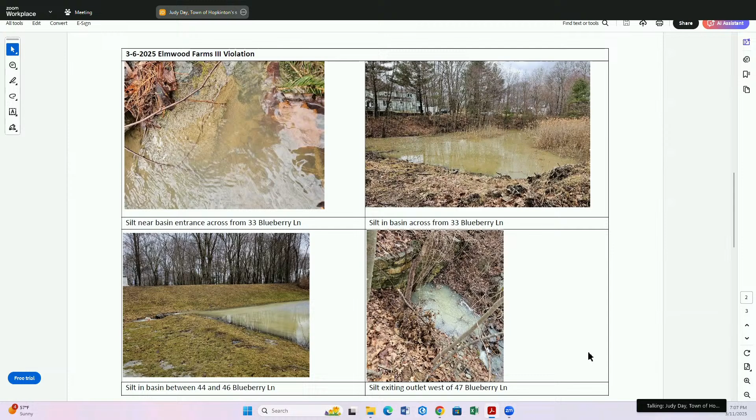The applicants, so Ted had said they weren't able to clean the silt out of the basins while they were frozen. So that's why we were trying to see if new silt was entering the first basin, which it did seem that it was.

Fitch was looking pretty dirty, with lots of loose silt on the roadway, and a lot of the wattles lining the roadway were in disrepair, ripped up, not continuous along the full extent of the disturbance.

Happy to answer other questions, or if Anna has anything to add.

Thanks, Jade. Thanks, Anna, for going out and checking that out. I walked around there also on Sunday and it was disappointing.

I believe we have Rich and Ted on the line here, and I'll give them an opportunity to speak before the commission weighs in.

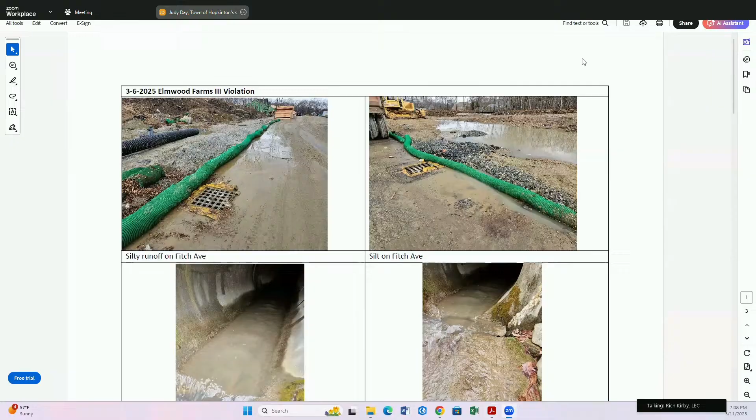Thanks, Anna. If I could share my screen, that would be great. Rich Kirby from LEC Environmental on the line tonight, and Ted Merchant from Toll Brothers.

Obviously, we're very disappointed to see the turbidity coming off the site after the overnight rain last week, Wednesday into Thursday. I was out there first thing Thursday morning to take a look at things, as was the commission's consultant. I talked with the contractor, and it seems there were a number of items that led to the offsite discharge of turbid water, but the primary one was the outlet control structure at the offsite basin, which was intended to retain all of the runoff coming from this site.

If the commission recalls, after the release at the end of December and early January, we met with you and implemented a number of measures to try and prevent this from happening again.

They included blocking up the outlet control structure, spreading seed, straw, and tackifier over large sections of the site that had been opened up, installing floc logs in some of the catch basins' downstream pipes, and installing silt fence and compost sock along portions of Fitch Avenue.

Since then, we implemented additional items, including installing temporary basins and temporary diversion swales along the pavement intended to collect and capture any runoff that was coming off the site.

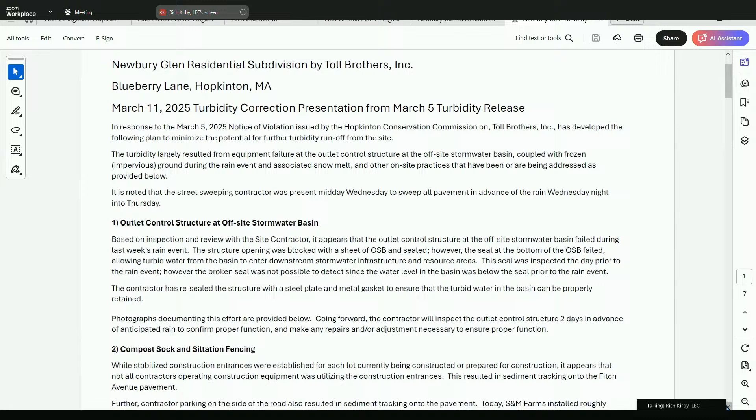We also had S&M Farms come out and install additional compost sock and siltation fencing along the length of Fitch Avenue, which is basically going to force the contractor and equipment operators to utilize those stabilized construction entrances.

It really wasn't possible to do that earlier because of the frozen ground conditions, and we needed to toe in the silt fence, which can't be done when the ground is frozen. We had a very short window between frozen ground conditions and the rain event, and weren't able to do it in advance, but it is done now.

We installed roughly 2,400 linear feet along both sides of the pavement. There is one 200-foot section that will be done on Friday after the contractor installs a utility duct, which parallels one side of the pavement along Fitch Avenue.

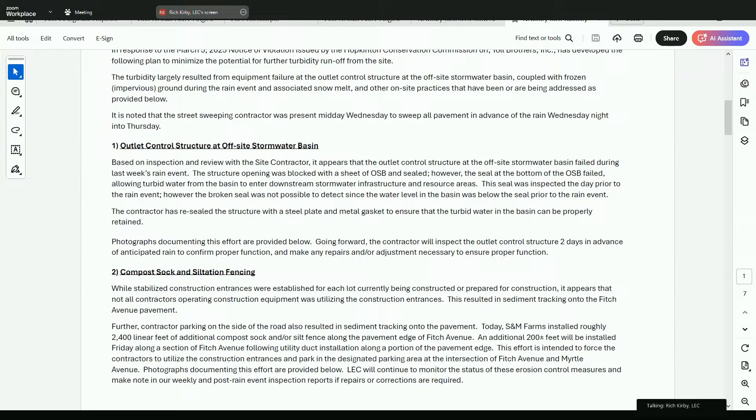On Friday, Hydrograss Technologies will be visiting the site to apply additional seed, straw, tackifier, and earth stop to exposed areas on the property. Most of the seed, straw, and tackifier applied in early January held, but some sections along the roadway shoulders didn't take as well because the ground was frozen at the time.

The ground is thawed at this point, so we're confident this will adhere much better. We'll be tackifying all along the perimeter drains, exposed areas on lots 8 and 9, the loam pile that's out there, and other exposed areas on the site.

We also installed additional floc logs within the drain manholes and catch basins within Fitch Avenue to further allow for sediment dropout before water enters that offsite basin. Lastly, prior to the turbidity release on March 5th, street sweeping occurred once per week. Going forward, it will occur three times per week to remove as much sediment as possible from the pavement.

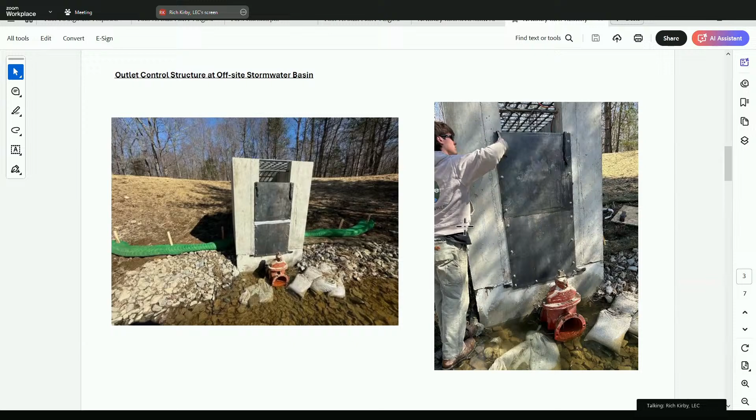Below are some photographs. This is the outlet control structure of the stormwater basin across the street, and this is the steel plate with the metal gasket that was bolted into the concrete. We're very confident in the integrity of this in terms of keeping the basin water out of downstream stormwater infrastructure and resource areas.

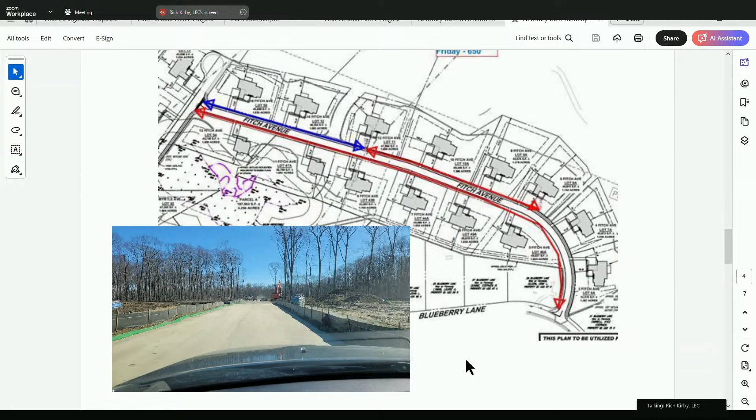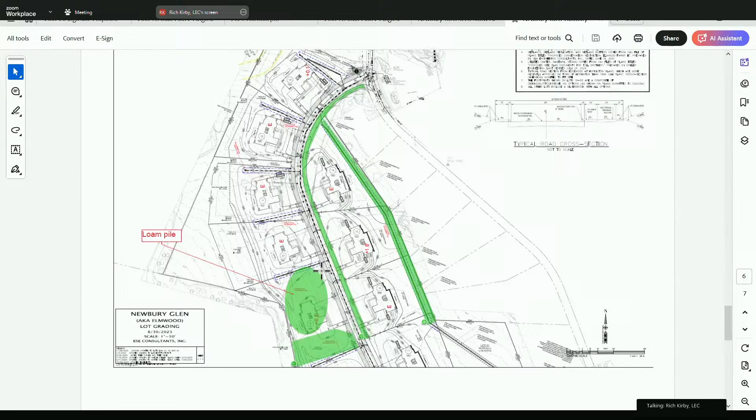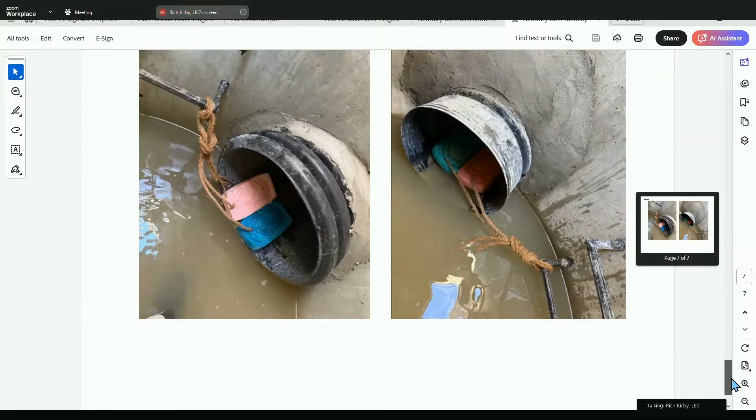So that provides an overview of our response to this. It's an unfortunate circumstance, but going forward with these measures—particularly the blocking of the outlet control structure on the offsite basin—I think we're going to be in pretty good shape. With that, I'm happy to turn it back over to the commission and happy to discuss further.

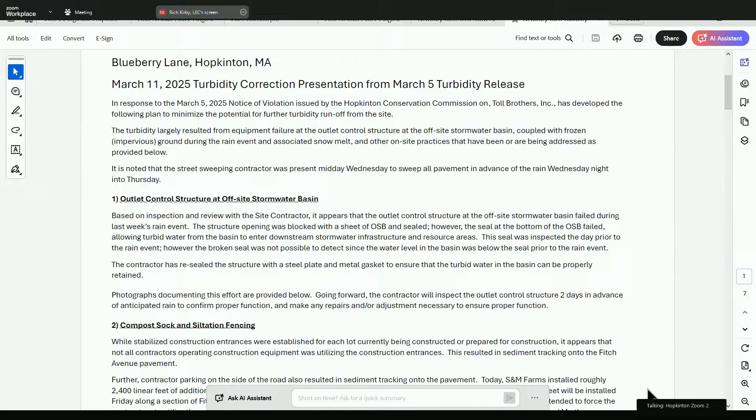All right. So I have to start by saying it's quite disappointing that we're here again—I think it's the third time in a row. We're kind of chasing our tails instead of being proactive once again. I think we're going into the worst season right now.

With the freeze and thaw and rain in the spring, we should be anticipating worst case scenarios, especially for this site, having already gone through this a couple times. So the commission is really not going to be very tolerant of what's going on here.

We really need proactive measures, not blaming the contractors for not using construction entrances. This is again a repetitive theme—blaming the contractors for not following the tree clearing line in the violation early on in the project. So the oversight on this project needs to be tighter.

It absolutely has to be. We really can't be coming in here after every single rain event fixing things—we need to be proactive. So that can't be a reason, blaming the contractors for not following the rules. It's the job of the developer and the people overseeing this plan to make sure the contractors are following and doing what they're supposed to be doing.

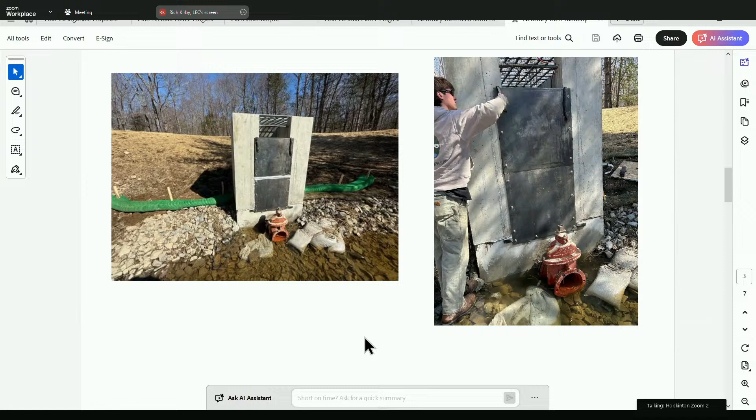Through the chair, I would appreciate another kind of level, because we're going into the spring and you can have back-to-back storms, and this thing fills up and it's not settled out yet to release through that valve. I think it would be prudent for there to be silt bags and pumps on site, in case this basin does fill up and you need a backup plan.

Through the chair, I haven't fully explored this yet, but I have a concept in mind at least of a recirculating pump and maybe some powdered floc in that scenario where we've got another storm coming and the basin remains turbid, to try to circulate. I can formulate a better plan probably in writing and submit it, but I think conceptually that might work.

Okay, yep, I'd appreciate that. Another question I had was at the intersection of Fitch and Myrtle, there was a big pile of dirt. What's going on with that?

There's a pile of sand that's being used as backfill for the utility duct being installed along Fitch Avenue and eventually Myrtle. I had instructed the contractor to install a compost sock around the base of that. Fortunately, that material is comparatively coarse compared to some of the really fine material we're seeing getting through the silt sacks and things, so it's less of a concern, although it is a concern. It is a pile of material, it's an active pile, but it does need to have erosion control measures around it.

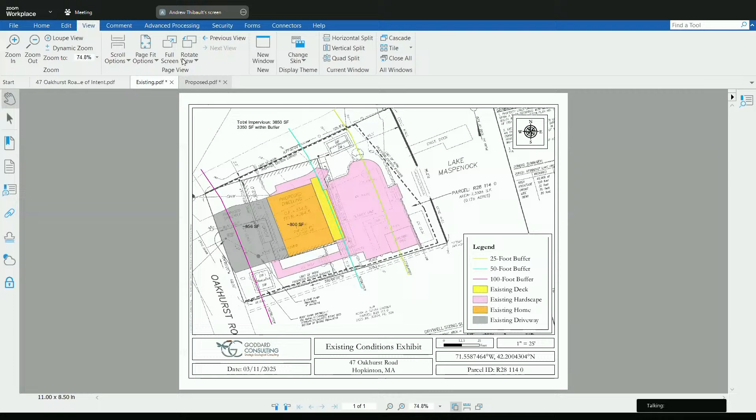Is to raze the existing dwelling on the property and construct a larger 1,731 square foot house, and to relocate the driveway to the corner of the site that we see here. The applicant has already received permission from the ZBA to do this. They went through the formal process and were actually able to receive permission for a 20-foot front yard setback here. The existing house is about 30 feet, so it helps them push as far as possible on the front of the lot, trying to keep the limit of work as far as possible from Lake Maspenock.

The actual project itself only results in about a 230 square foot total impervious surface increase on the lot. About 381 square feet is increased within the buffer zone, with a net reduction outside of the buffer zone. They were able to do that by working over significant areas of the previous dwelling and the previous driveway. As we can see here, much of the property is landscaped and hardscaped all the way to the bank of Lake Maspenock.

At this point, we received our DEP file number. DEP had a few comments surrounding the existing dock and the potential for the commission to review mitigation plantings for the increase in impervious surfaces with this project.

I know the commission's peer review consultant is still working through the field review and the notice of intent review, and Judy Day has given us a few comments so far in the application. I think most important to note tonight is that Judy had noted that a lot of the hardscape we see in the rear of the property appears to have been done without a permit around 2020.

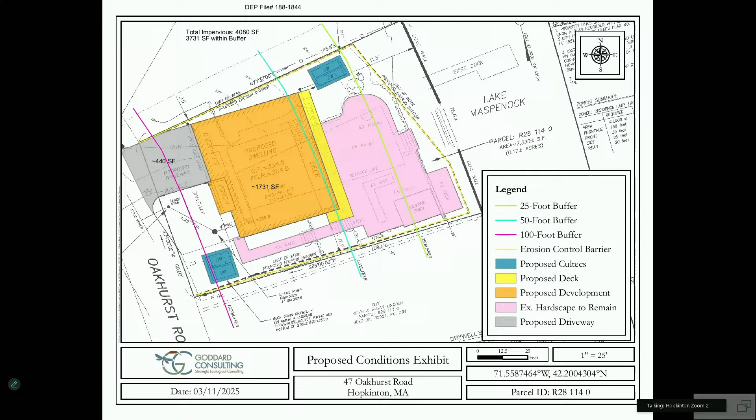Are you familiar with what the commission has been asking of applicants along Lake Maspenock lately? We've been doing it for years now, looking to improve the water quality of the lake and the conditions by having homeowners incorporate a buffer strip - a planting buffer strip, not lawn, something from like the wall or the lake edge toward the property to filter out runoff.

I actually wasn't familiar with that off the bat, but upon DEP's comment and then Judy's preliminary, I did actually meet with the homeowners last Friday, and we had a discussion about the potential for some good mitigation plantings to be used on this property, and they expressed being absolutely open to that. So I think that's definitely a proposal we can come back with. Okay, that'd be great.

Through the chair, Andrew, can you stop screen sharing for a second? Because it's pulling it up strangely, like you can either pick Judy's screen or her screen. Thank you. Oh yeah, no problem. Okay.

Okay, yeah, so this just talks about the walls exclusively. Yeah, that's right, I remember this plan. It provides reference to an existing patio, but it doesn't show its coverage. I think that might be something we can try to measure, at least approximate, using aerial photography to see what was there at this time.

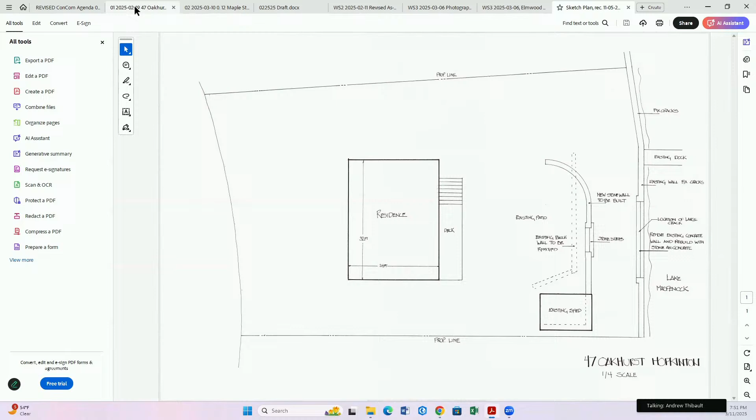Through the chair, Joe? Yes, go ahead, Joe. Yeah, I think some of the photos provided in the application also show the pre-existing conditions at the time they requested the initial work on the walls. Okay, yeah, that's right, I did see some - it looked like a lot of grass to me. Exactly, yeah. The homeowner had a few photos. I also did have a chance to get out to the site this morning and take a look at it.

I know there was a comment made about not having to delineate any wetlands above the retaining wall, but I know as the commission is aware, there have been other locations along the lake where we have had bordering vegetated wetland fringe above that wall. I did do some augers this morning. The soil was still fairly frozen, but I got some augers through, and there is hydric soil above that wall. There's not much wetland vegetation at this point because of the season and because it's mowed low, but there is hydric soil, so I would recommend the applicant have that delineated also.

May I ask Joe a quick follow-up? Would that mean the buffer lines need to move closer to the road if we have those soils inside the retaining wall? That is correct.

I'm not sure who has the screen, but if you scroll up a couple pages, there are the old pictures. Yeah, so that looks quite different. It doesn't look like a ton of hardscape at all.

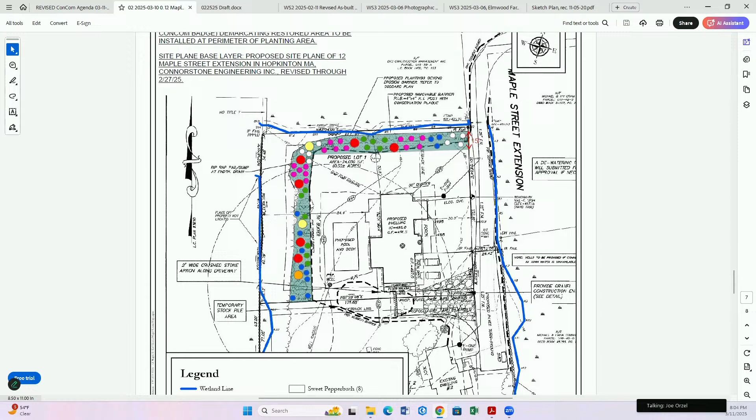Yes, that is, I did mention that earlier. It's covered up under a couple of sweet pepper bush circles there, but it is shown there, yes. Okay, yep.

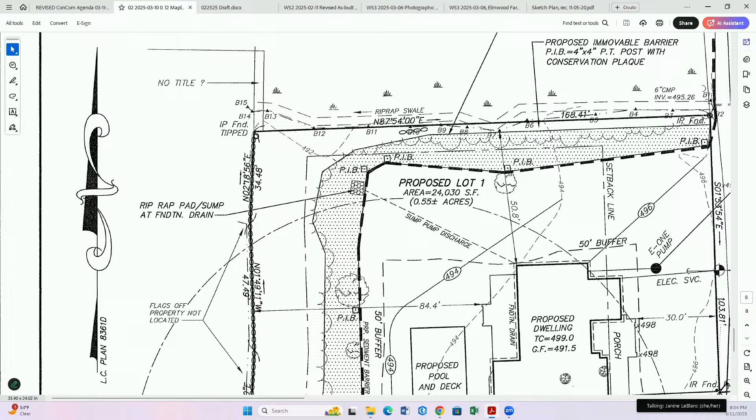And Janine? Yeah, so just looking for the PIBs, I see one reference to a PIB at the bottom of that grayish green section, but I don't see any others. Is it along that black dotted line? Yeah, they're shown along this black dotted line here on the civil plan. Oh, I was looking at the one we have up in coloring in front of us. Okay, yeah, thank you.

That kind of cuts off some of the important information here in the interest of being a more usable scale, but yep, the civil plans do show those PIBs along the entire perimeter there. Yeah, I see them, thank you.

Okay, yep, absolutely. And what are the PIBs? Are we talking about a fence? Are we talking about stakes? There's a note, if we scroll up just a tiny bit - they're 4x4 PT posts sunk into the ground with conservation plaques.

Okay, so yeah, I think especially looking at this plan, for consistency, like you said Ted, that line will come down straight to meet the 50. Oh, so it's not just shown on the planting plan, but shown on this civil plan as well, and those PIBs will come down to be along the bushes. Absolutely, yeah, we'll get that change made for you folks and get that submitted to you.

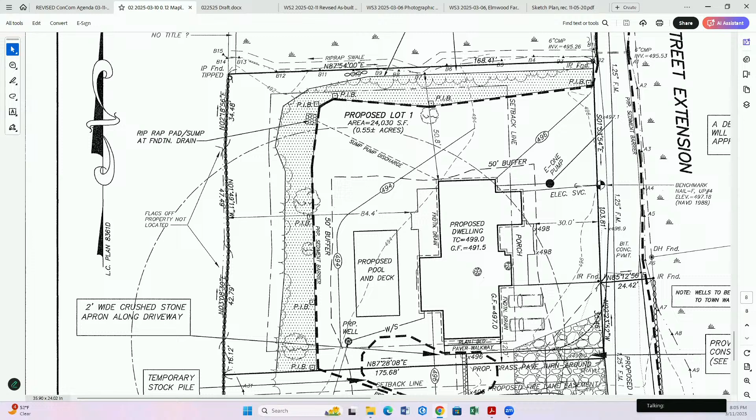Okay, commissioner, are we comfortable voting on that and issuing our vote contingent on receipt of the plan?

I'm good with that, Melissa. Are you looking for a motion? I'm good with that, yes I am. If everyone's good with that, sounds like they are. So I'll take a motion - and we should include with signatures? With signatures, yep, and by Anna or Judy. So I don't want to rephrase the motion - if it's understood that that's the motion, I'll make it.

All right, thanks Ted, for that motion. And I will second that understood motion. All in favor - Ed, aye. Jim?

You there, Jim? You're muted if you are. Come back - Janine, aye. Ted, Ted is an aye, I guess. Aye. Matt, aye. I am also an aye. Jim, one last chance? All right, it'll carry with those votes.

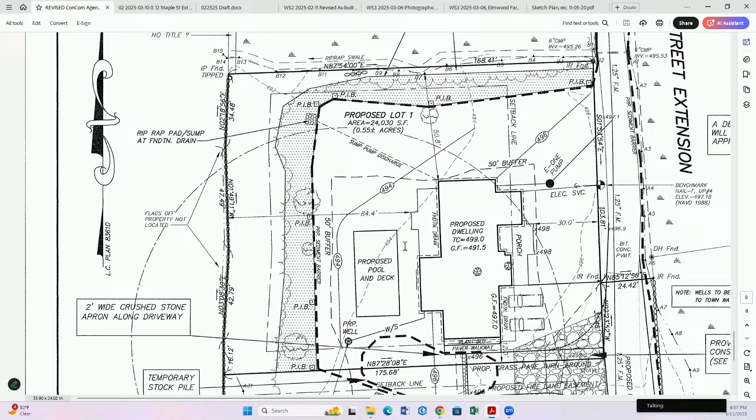All right. Next up we have 18 Falcon Ridge Drive, request for COC. Judy or Anna, you want to go through this one?

Yep, happy to, just pulling up the plans. Here we go. So this was an original order issued back in 2022 for septic replacement, installation of a pool house, outdoor kitchen, patio, and site grading.

Joe had a couple of comments that have since largely been resolved. He mentioned the erosion controls should be removed, except in certain areas, west of the pool house and southeast of the septic. We are waiting for confirmation of the erosion control removal prior to recommending, or I guess we're waiting to hear from the homeowner that those have been pulled out, but he is aware that they should be pulled out prior to receiving the certificate.

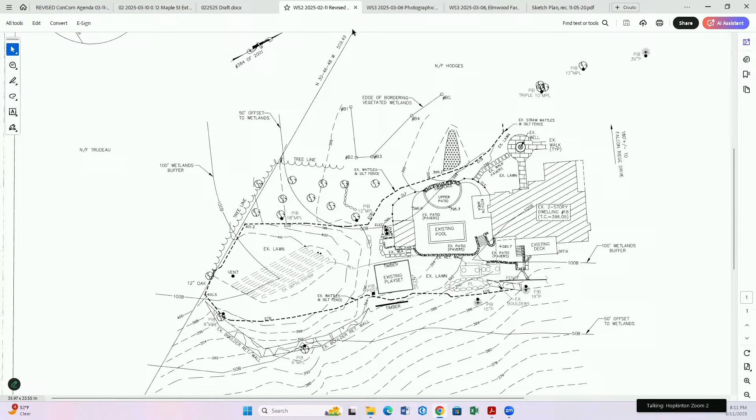All right, do we have any public forum requests? Anything come in last minute? No? Judy, you're on mute. Oh, nope, nothing. Okay.

Awesome, all right, it's another quick one. Given that it is a quick one, I'm just looking at the meeting dates at the bottom of the agenda. I'm wondering, Melissa, Judy, Anna, should we be talking about an in-person meeting? I think it was in this commission, not in Zach, where there was talk that maybe the remote meeting law might not be extended much anymore. But we haven't had, I know Ed prefers the in-person 100% of the time. I don't necessarily, but we haven't had an in-person for a while. I wonder if one of the ones that we have coming up should be in person. Is it too late to make them in person?

Yeah, I'm just looking online and it looks like March 31st, 2025 is the current extension, or basically when the remote meeting law extension provision ends. But it certainly could get renewed. It could get renewed, yep.